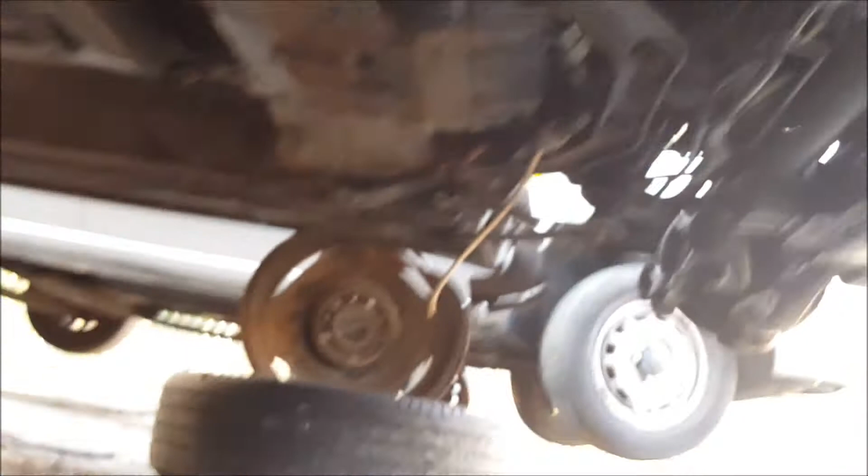Let's look and see how this transfer case and everything works. So see the transfer case back there. Yeah, you'd need to tub out the 240 to put that in, but man, that would be pretty sick. Let's go see the drive shaft and stuff.

Yeah, look at that, freaking beautiful. I wonder how much horsepower that transfer case can take.

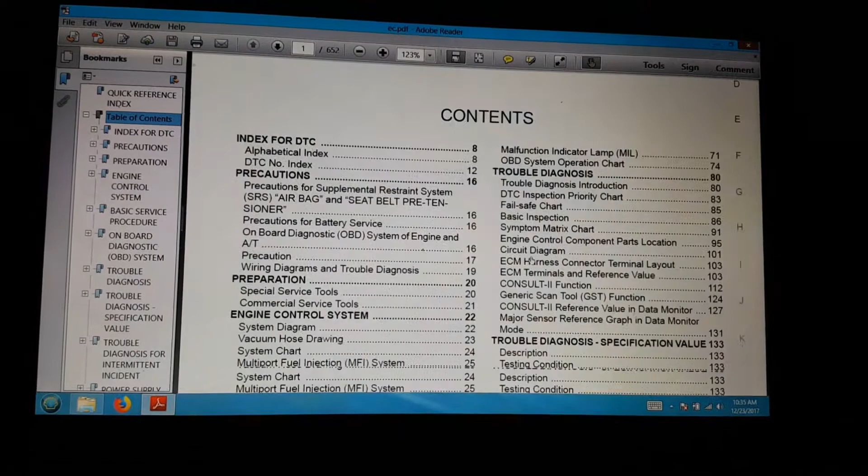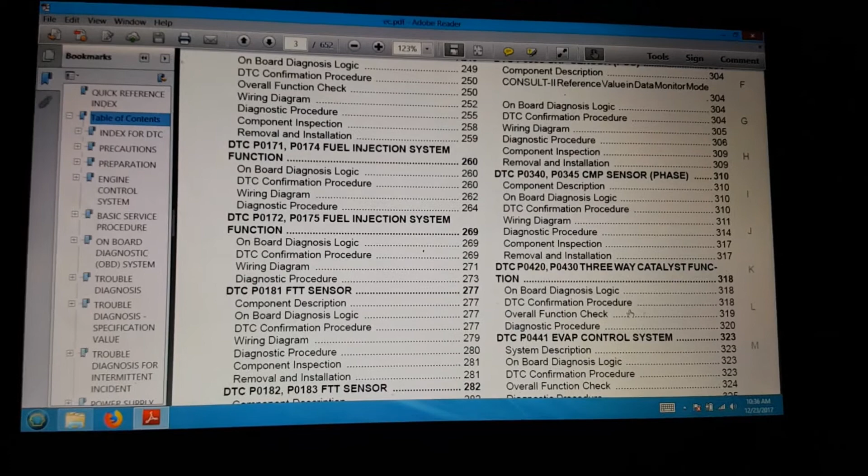Anyhow, that's alright guys. So on one of my earlier videos I was reading, trying to figure all this out. Basically one of the things I read online - this is like a PSA. Don't listen to everything you see on the internet, unless it's someone showing you exactly what the FSM says.

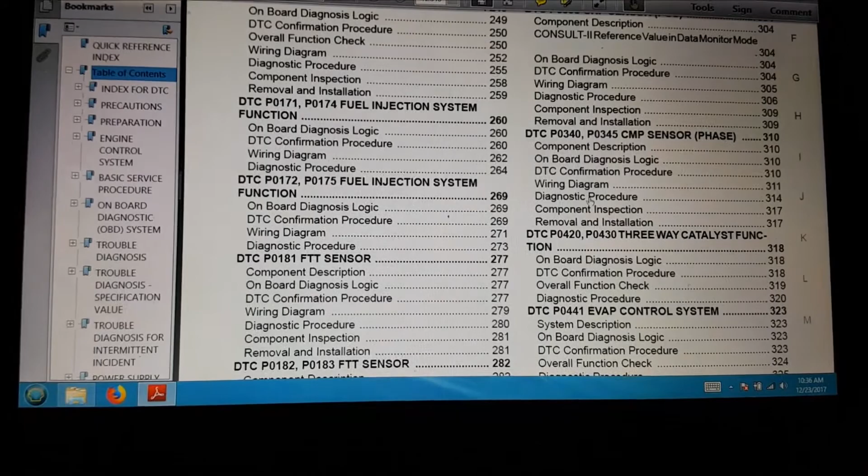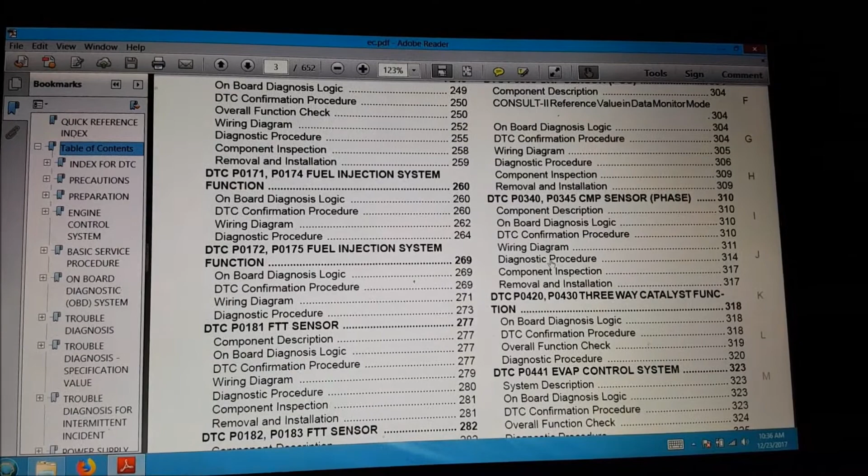So what happened was, reading up on the cam sensor, they're like 'oh it's a 5-volt feed,' but really it's not. It's a 12-volt feed, but a 5-volt output, which is generally how most of your systems will be, TPS and whatnot. So here goes the layout for it.

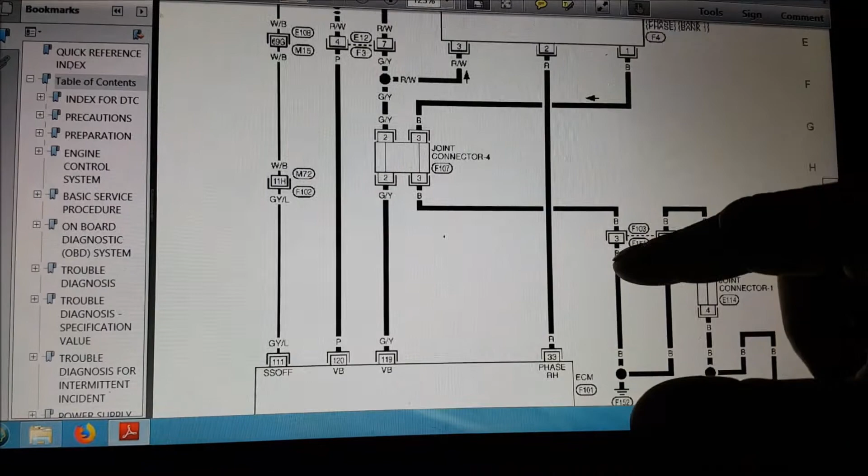At pin 33. But then this one is number 3, red and white. It goes here, and then to the ECU at pin 119. So I ended up going there.

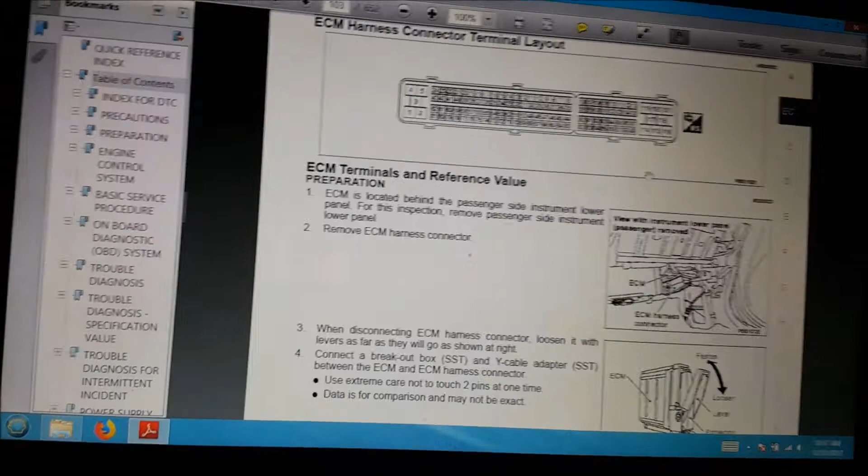This is why FSMs are the shit. Let me just go back. So after that, you'll go here to the ECM harness layout, and if you start reading it out, here goes all the terminals.

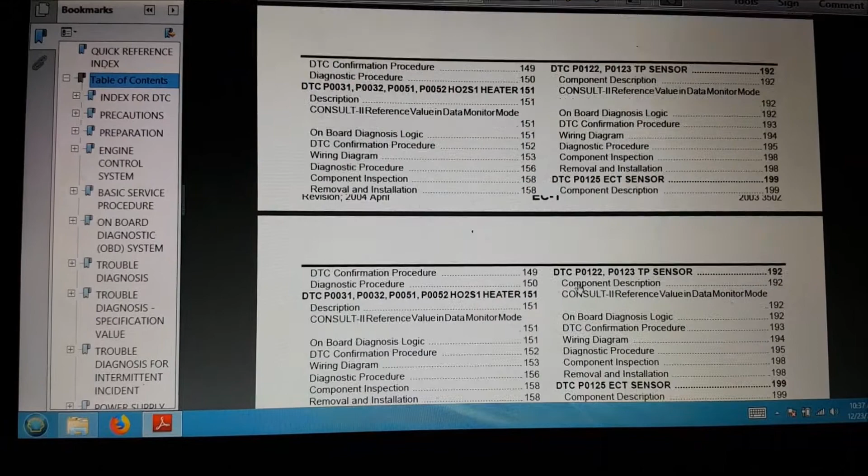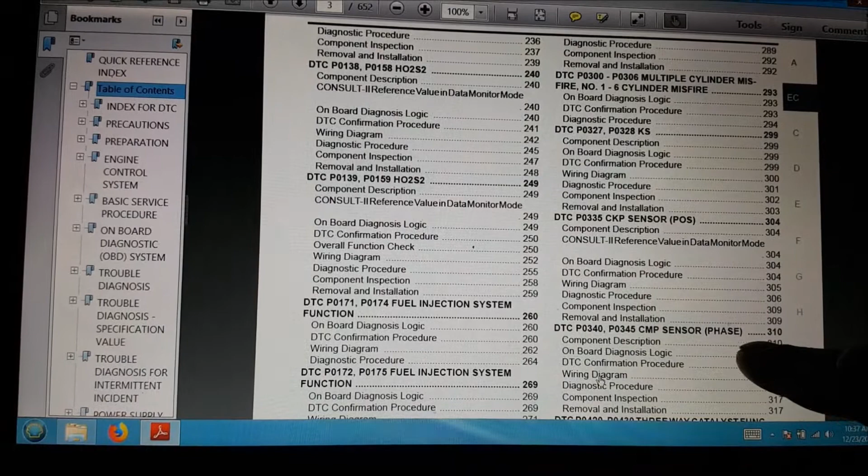Oh damn it, I think I just forgot the terminal I was looking for. I know it was like 1 something. But this is good because I was just reading all this and this stuff doesn't really make sense - like how they said CMP phase, CKP crank position, cam. They should have just put cam.

Yeah, this dude's playing video games.

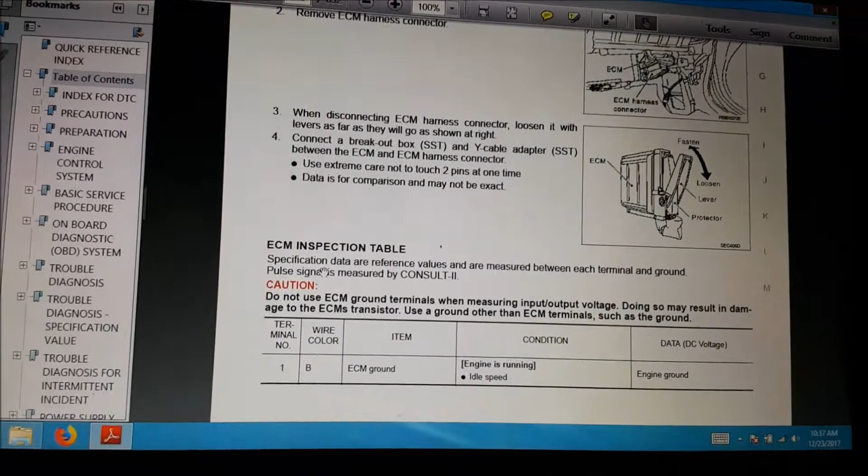But anyhow, so we're going to go back. It's 119 that we're looking for. So go back here and go to the layout, and then we're going to keep going till we find 119.

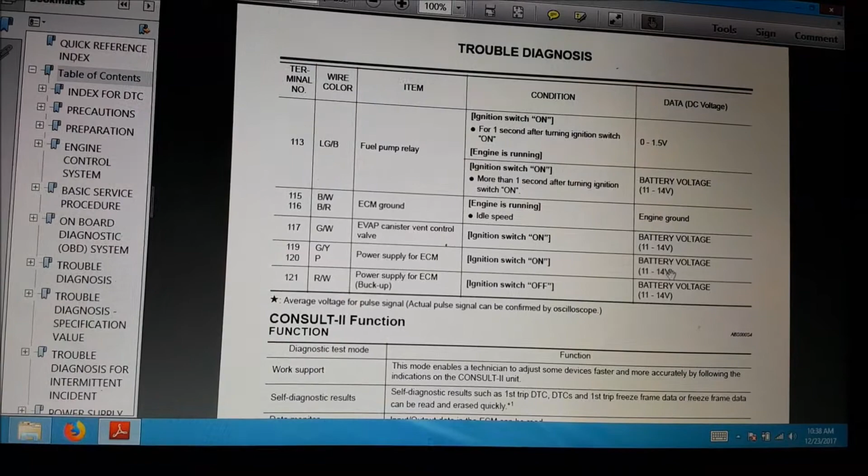So you come here, 119 - it was the green and yellow one. It's the power supply for the ECM, and we should see 11 to 14 volts at this. So that means all of the cam sensors are 12 volt.

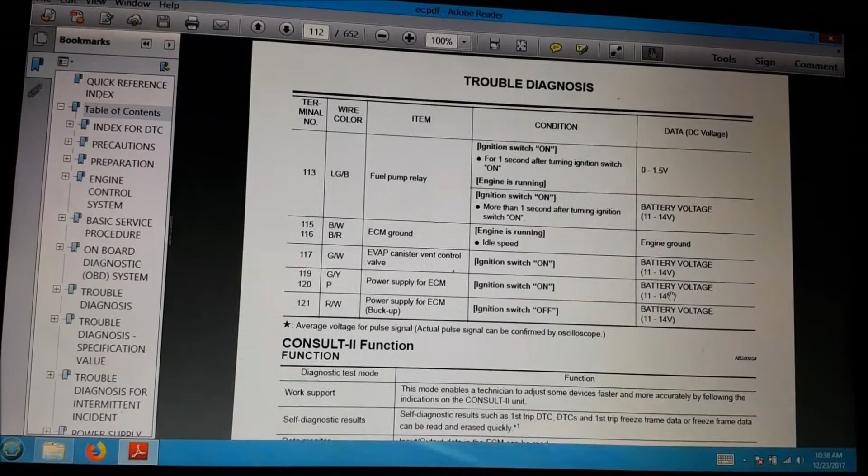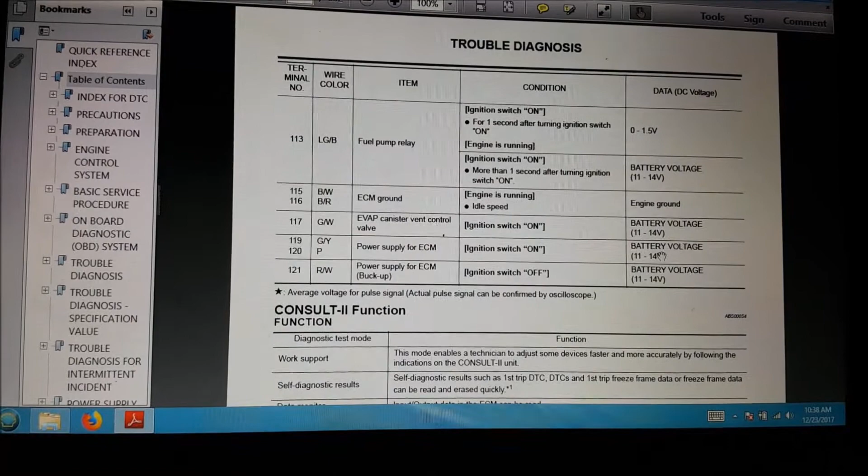It's pretty easy too, because since I've looked at it, the black is obviously ground, the middle is going to signal, and the last one's going to be the 12-volt source. So I'm gonna run all those back to the ECU because I have a 12-volt feed on that port.

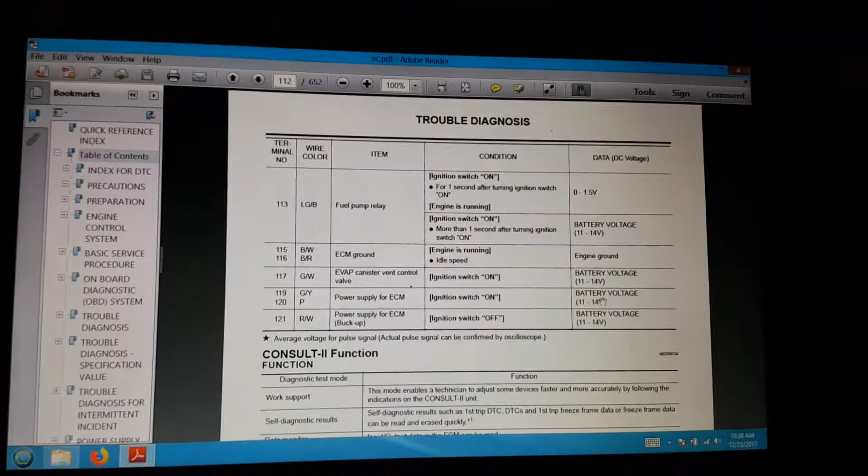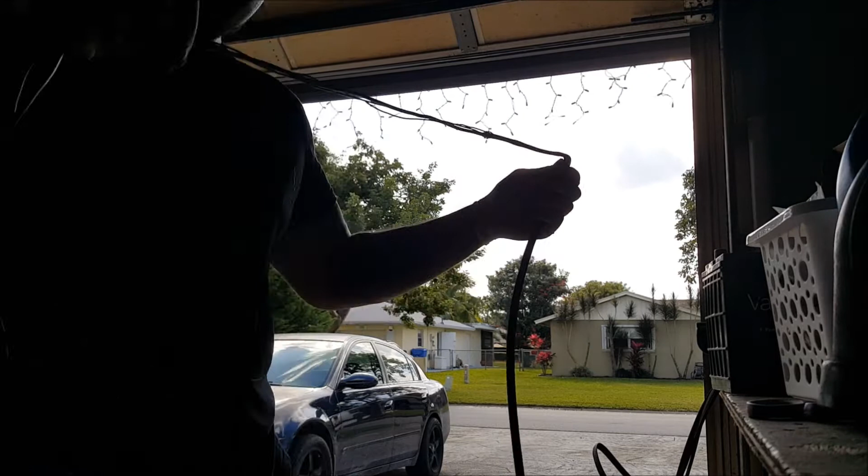All right, so this wire loom - this is the TPS harness that I have, and this wire loom that I bought, man, it's like you guys ever remember the Chinese finger trap toy, where you stick your finger in and try pulling it out and it grabs? Well, it's a braid, so it operates the same way.

As you see what I'm doing, kind of sucks because you can't just pull it and drag it through. You gotta find a close end of where it is, and what I do is hold a little piece behind it, push this up, grab the other one, and walk it down. This one's gonna take a little bit - this is like my longest run, about 8 foot of wire.

I'm not going to possibly use it all, but this is running from the front left engine bay to the back. At least I'll have it this long and run it through to get it to where it looks clean and hopefully stock-ish. I'm not going to do a wire tuck, but since I have control of doing these wires, I can at least clean it up a bit. It wasn't too bad.

This is the 3/8 wire loom for 100 feet. It was like $15, and I only bought one. I figured I'd join them all up with zip ties or whatever. I think it's good that I did that, because I'm separating it instead of putting everything into one big wire loom, so it'll be easier to pinpoint which harness might be having an issue, if I do run into one.

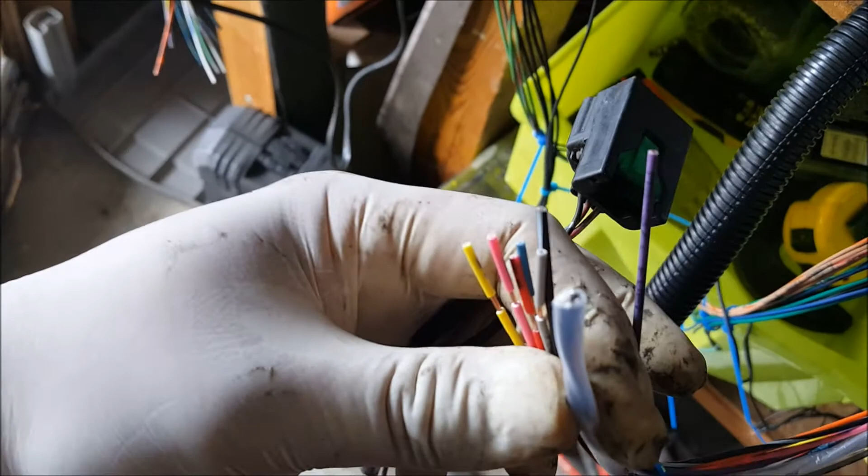The shielded wire will go to the signal, and the ground I joined up with the other ground of the sensor, which in turn will ground all at the - I don't have the harness here - but at the ECU harness, on the black white. I'll join it up there, where's that black white, anyways yeah - that's for the common sensor ground.

So I did that to keep it clean if I run into issues down the road with cam signals or whatnot - then I'll do another shielded harness if I do have an issue, because obviously it's there for a reason. If I start getting some disturbance, I'd probably need an oscilloscope to see that, but since I'm wiring these up piece by piece, I can just go and join it and create a new one.

Let me see what the fuck's going on here with this crazy.

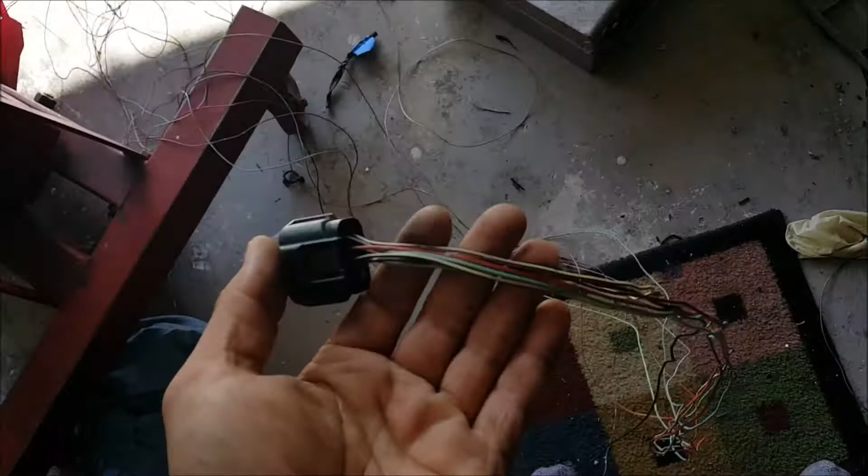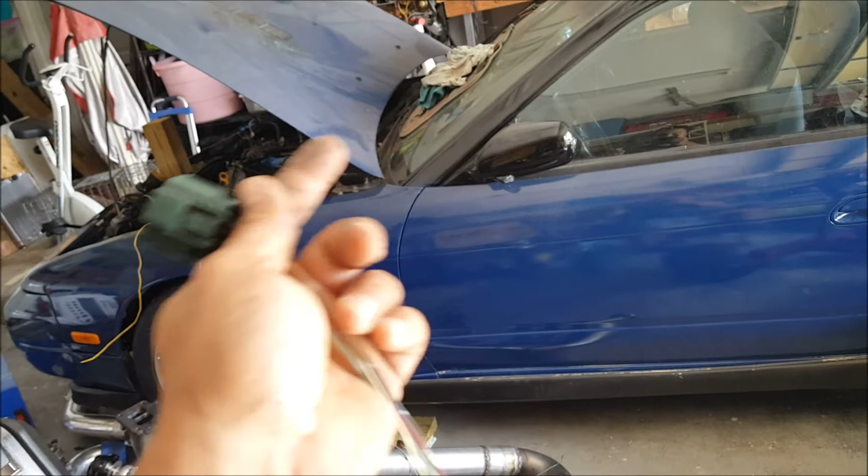Alright, just another quick tip - well, not tip, but it's pretty sweet, because this is the injector harness. As you can see, there's a sub harness that connects all of the injectors, and there's this plug in the back. So now this plug, it's an 8-pin plug.

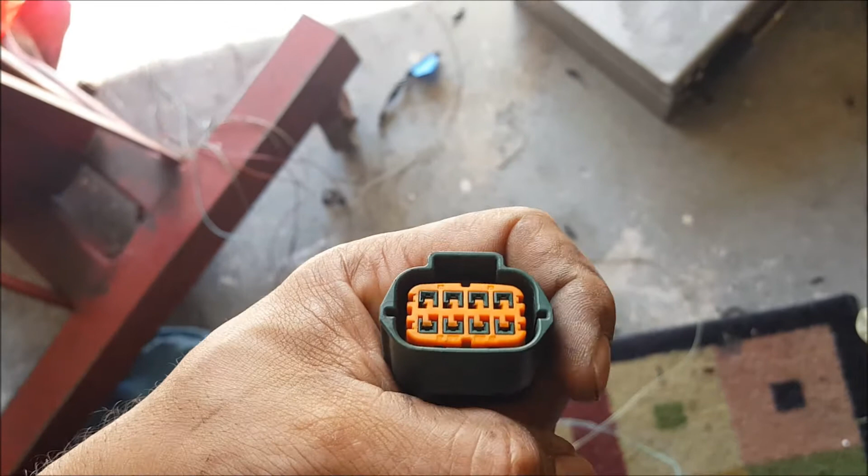You see pins 1, 4, 5, 8 - this has basically the ECU signals, where the ECU grounds out the fuel injector to complete the circuit, and the other side of the fuel injector is a 12-volt input signal. So basically, once the ECU grounds it, then it completes the circuit and opens up the injector.

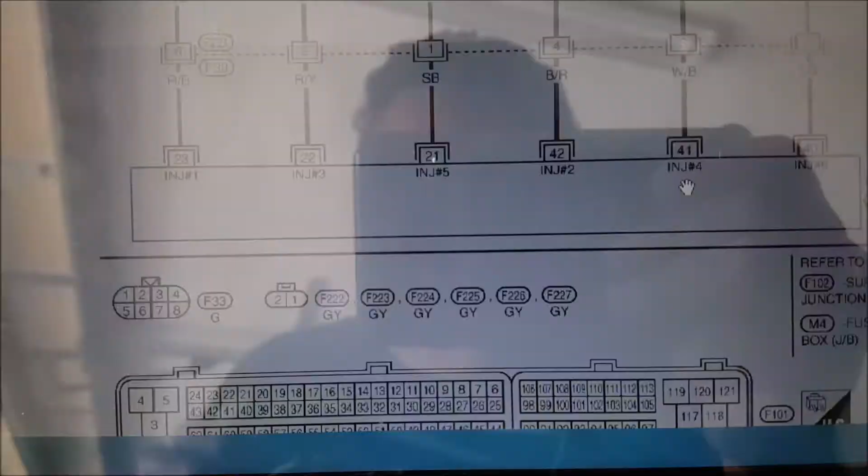That's what's up. I have this all here, and I'm pretty excited because I got this nice full wire. I don't have to design anything or do anything - all I gotta do is put my loom on and run this.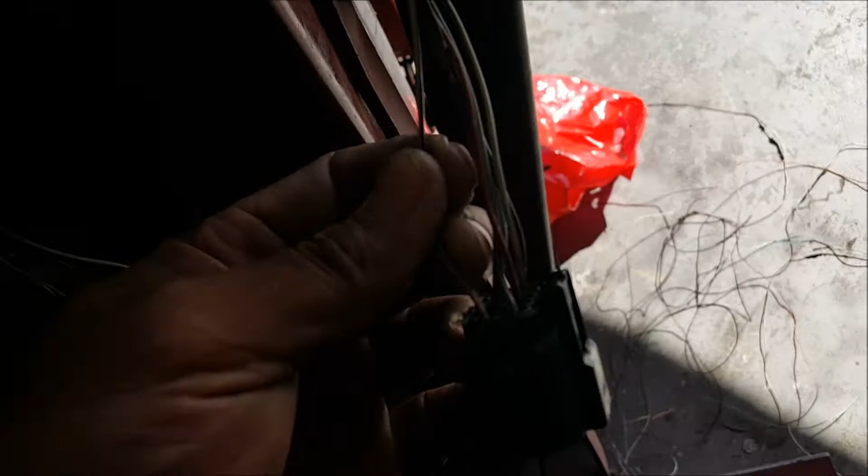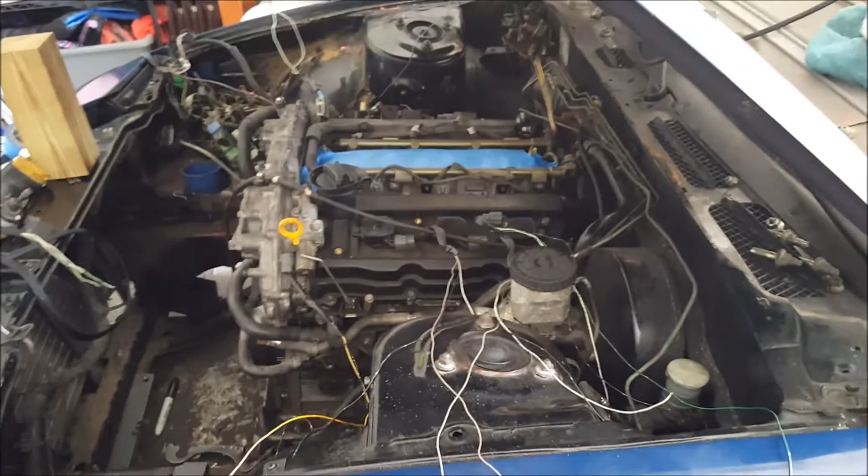The only thing is pin 5, which is this white thing right here - damn, you guys can't really see. There we go, better. This white on pin 5 is my 12-volt source. That 12-volt source is just going to be on a switched source, and inside the harness it joins up all of the 12 volts, so it makes my life much easier.

So I'm pretty much getting there. I already have my cams done, coolant temp, my grounds and whatnot. I'm just working on the VVL, working on the injector harness, and look, I already have those ran - you see how it is in there.

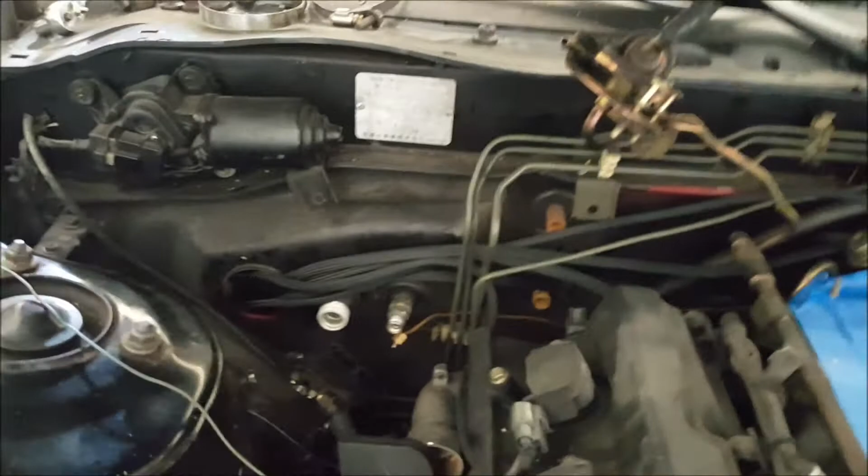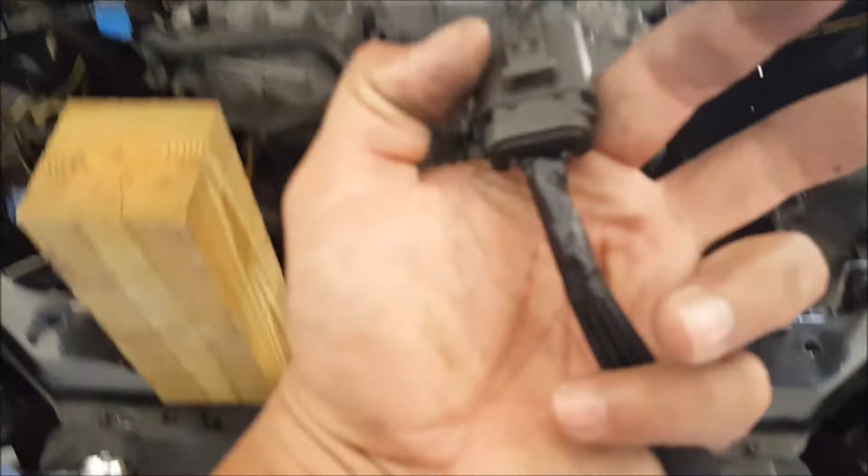I mean, maybe I might take a bigger loom and encompass them all in, but I have my manifold air temp here. I also have this guy, which is pretty long, and I tape them at the end just like fuel - it looks clean and helps keep it from being frayed. But I have that long guy, and once I get the piping, I'll figure that out and put it on and trace it out.

This thing is almost getting done. Like I said, just the VVL, and then I had to start figuring out what I'm gonna do for the spark plugs. I don't know if I put this on another video, but here goes the plugs that I buy - they are NGK V-Power, whatever. They're 4554s, heat range 8 non-resistor plugs.

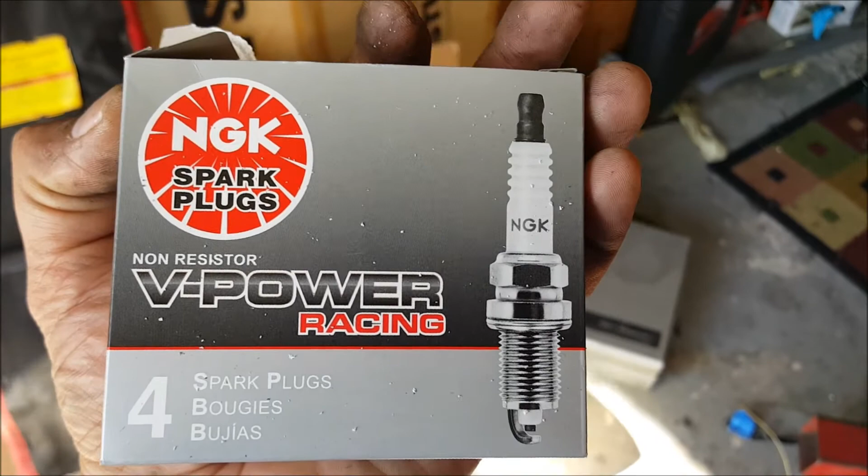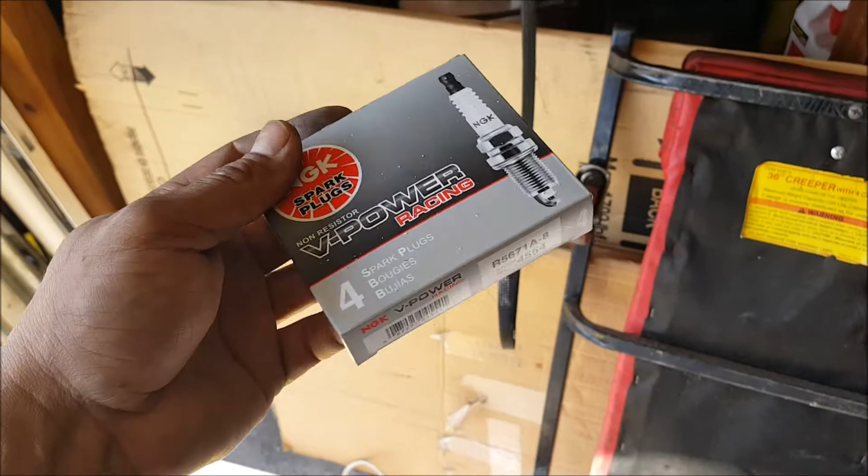They work great, and they're only $3.49 a piece, so it's like 18 bucks for all of these. Or maybe, I don't know, but anyhow it was something around that nature. But got all that, and yeah man, we're getting everything done.

Got my laptop. So one thing, guys, I wanted to point out for this, for me as well as future reference, is on this injector harness there's actually 2 black whites - and there they go, these 2. But when you look at the, damn it, keep dropping that plug.

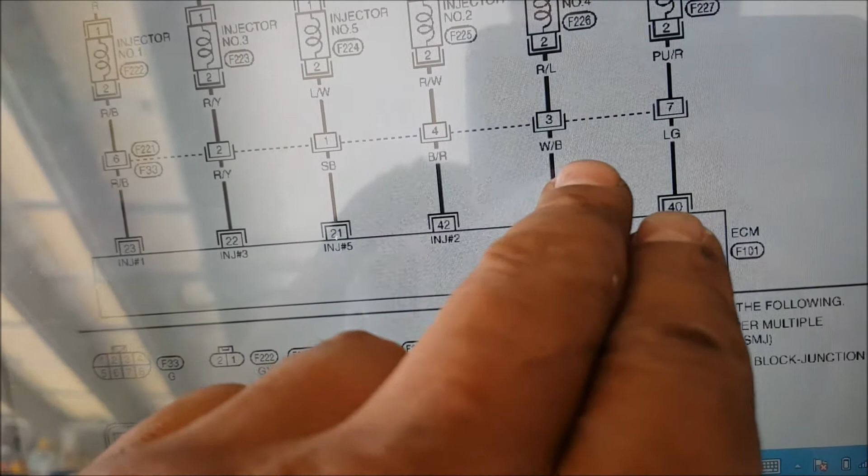When you look at the FSM, the white black - where are we at? Okay, it's right here, it's on the bottom, because the actual color changes from that harness. I don't know why they did that - that's kind of stupid if you ask me. You see, this is coming from the ECU to that harness that I have, and after that harness when it connects to the injector, it turns to a red white, a red blue, purple red, instead of being light green. And this one, the SB threw me off, sky blue.

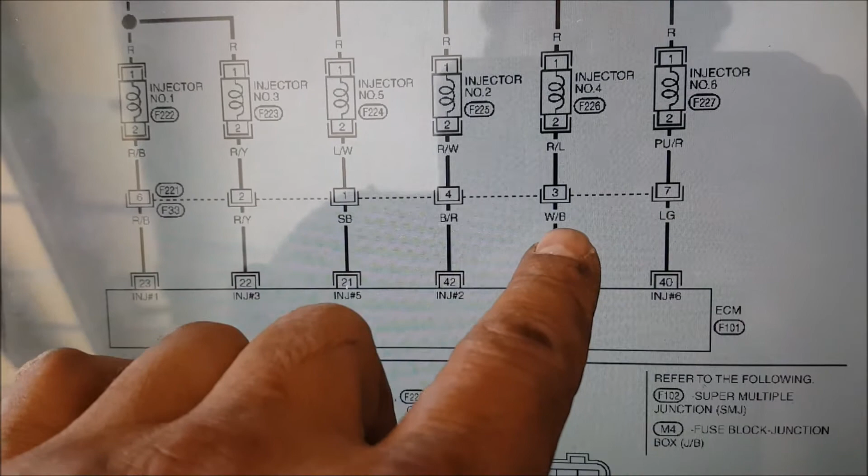But anyhow, on that harness it has 2 white blacks. So one white black is on pin number 3. Pin number 3 is, when you're looking at the plug, this is how you read it. So you see things - pin number 3 is going to be this one, so when I flip it, it's going to be the second one on top from left to right.

But then you see that other one, pin 5 - this is what I was telling you, that's the power. Pin 5 isn't used anywhere here, you see 1, 2, 3, 4, 6, 7 - there's no 5. So basically that 5 is your power. I don't have to double check it because I already know how injectors work, but you could double check it. But anyhow, that's just what's up. So I just wanted to point that out for me, and as well for you guys.